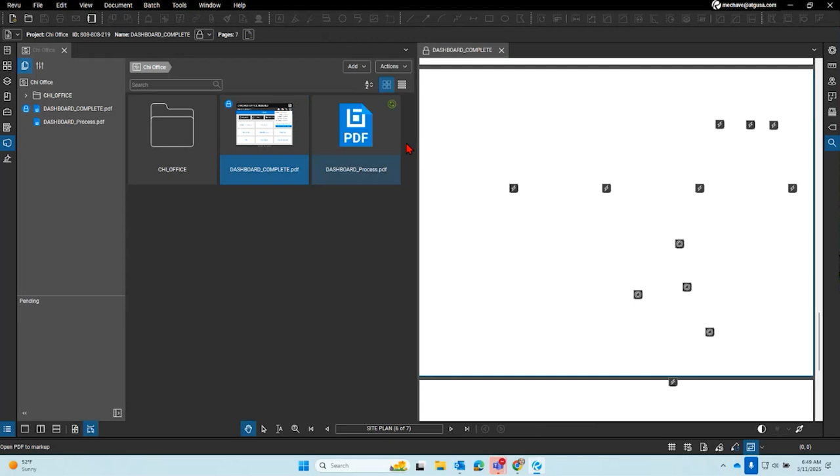That way everyone has access to the similar set of documents, right? So if I go home here, this is not the flattened one - I think this is the one that I created. But if you look, these Thunderbolts won't be here because you typically flatten the PDF so it's clickable. But this gives you one local area to store PDF sets.

So essentially what I could have done on a PDF is store RFIs that link to a location. I'll show this process, but it won't be linked to a specific location in projects because I don't want to go through that whole workflow. But basically you could store items here referenced to something on the PDF requesting for information, and have that documented in your project, then send an email saying, hey, reference this RFI - people can go look, it's in projects. So that would be one thing, it's not alerting somebody, you'd have to email, but that would be the process.

So if I were to go through and create a new project, we'll upload just a PDF set here. New project, MCR 2025. I'm not going to create a dashboard - if that's what you're hoping, we could do dashboards a different day, but we'll just do CDs, and then we'll do another folder called RFIs.

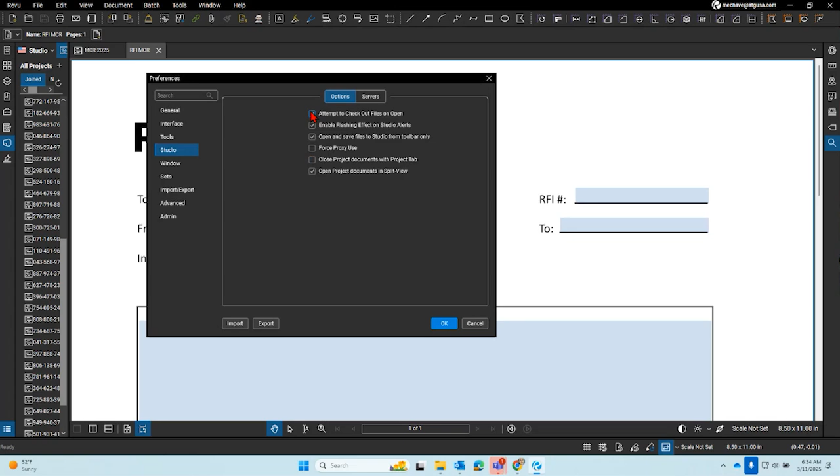All right, there it is, saved - save as, I don't think I have my... Yep, have your what? I don't... that's no, okay. I don't have my studio thing set up. This came up the other day too, and I forgot about it. Yeah, I think it's this one - nope. Search for it, I just forget what it's even called. So let me close out. I know what you're trying to get to, and I can't think of what it's called either - the dialog box, your open save. Yeah, it's my file path. One second, I'll remember - I'm just going to drag it because I already know I can do this manually. Okay.

So if I go through and look at my PDF sets, we'll just use this one as my example. I can click into here, I can open this up. Now, how Bluebeam Studio Projects works is a check-in, check-out basis - so you check it out or check it in to make revisions.

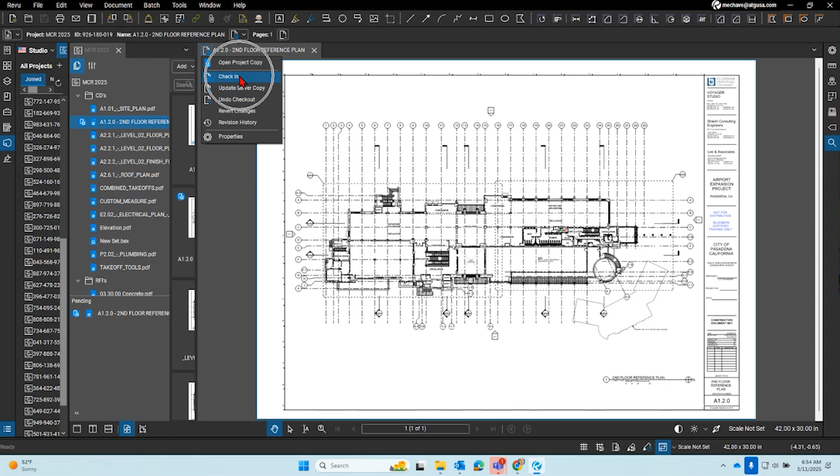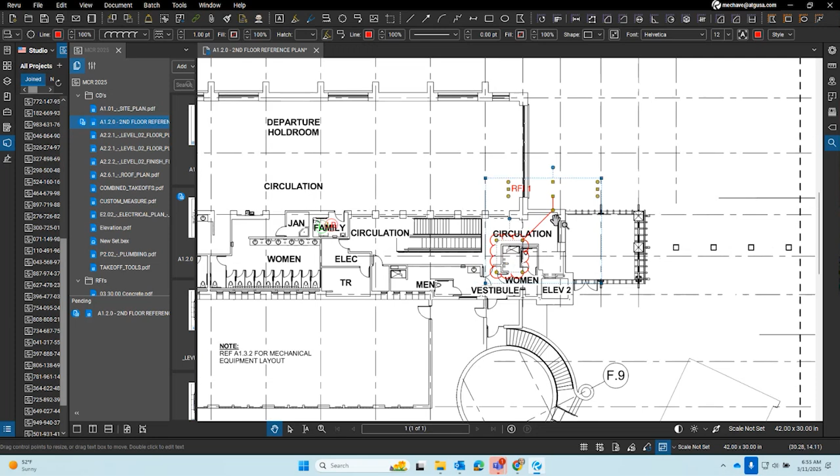Now if I needed a request for information for a specific area, I can easily go through and use a markup and tag it as RFI something, RFI 1, right? That's great and all, but it doesn't tell me what is the RFI 1 PDF, because if I send it to somebody, they're going to have to go and look specifically for the RFI - that's going to take time. I want them to be able to action hop to something. So what I can do is come into here and do an action.

So I can edit action and go to a hyperlink. Nope, we're going to open to a file location and it's still not working. Okay, so this is where we're... Alex put it in the chat. So go to preferences and then interface.

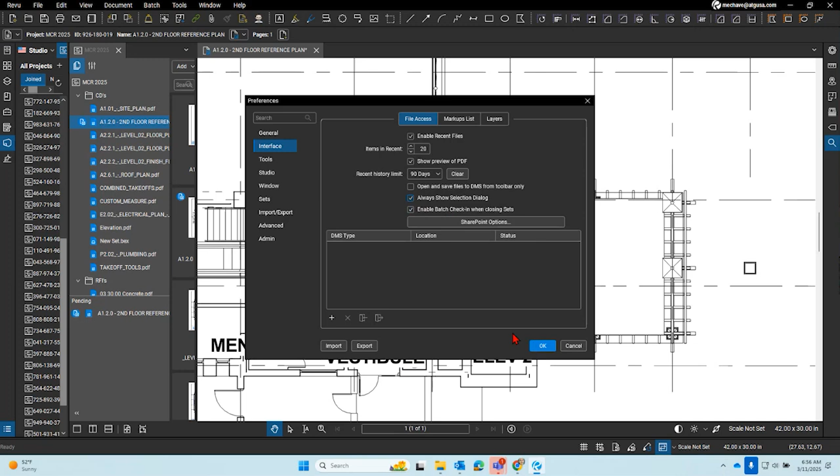So it's not this one. It's not this one, so I'll uncheck those. Interface, and then always show selection dialog. There you go, we're testing Alex's theory here. Make sure that's always checked. It's one of these, and I used to have it, then I deselected it because everyone's like, why do you have to open up two different windows to go to a specific location? Nope, that's not it either.

Hold on, maybe let me... Do I need to hit save? Yeah. It shouldn't be that. Maybe you have to open it and reclose it. Hold on. Dum, dum, dum, dum. Nope. Still not working. Okay, one second.

It's this one. Open and save files, yep, from Studio, from toolbar only. Yep, that's what it is. Okay. So it's this setting right here. I just need to... so let me read this setting right here.

This allows you to open from a location that's not just your local desktop. So going back, there's a lot of MCRs here. Close that. Okay, so going back to my CD sets, going back to this one. I think that was the one.

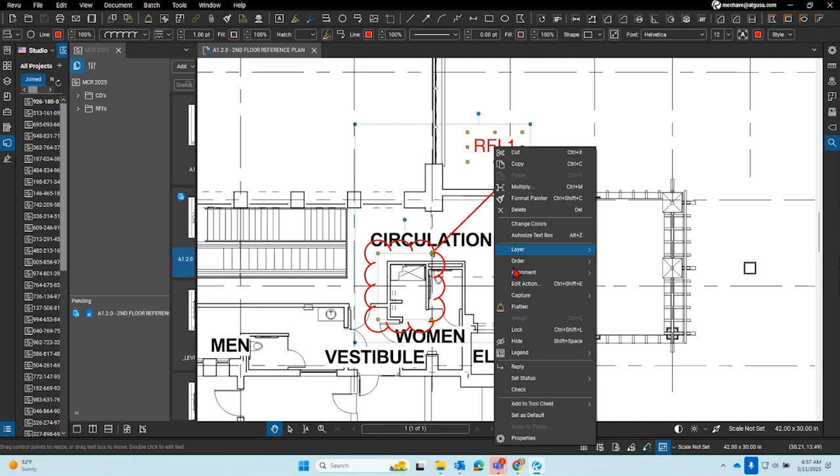Yep, open, check out. Now I'm going to make this as a link. So edit action - it's going to open that RFI from my projects. So it defaults automatically to the project that you're in, which is great when you're doing this workflow. But if you need to go to your other projects, you can just click this button and then scroll through and look at your other projects.

Now, the reason why this is working, let me restate that - the reason why you'd want to do it this way as a workflow is because, how are other people going to consume my collaboration of files, right? So for projects, you can be in... no, you still need a license.

Oh, where are you going with this train of thought? Well, because you can't have a free license and get access to projects, but can you with a free license of cloud? So that would be my question. Because what if you invite somebody that doesn't have a license of Bluebeam Revu? Can they still go into projects? I know they can go into sessions, but they can't typically go into projects, right? Because they have to have a license. So that was me testing a theory.

Someone would have to have a license for you to be working in this collaborative method, but maybe it's cheaper than other alternatives, I don't know. We'll have to go back and visit that from a free license perspective - I'd have to sign in and see. But anyways, going back full circle, so you can come in here and reference that RFI.

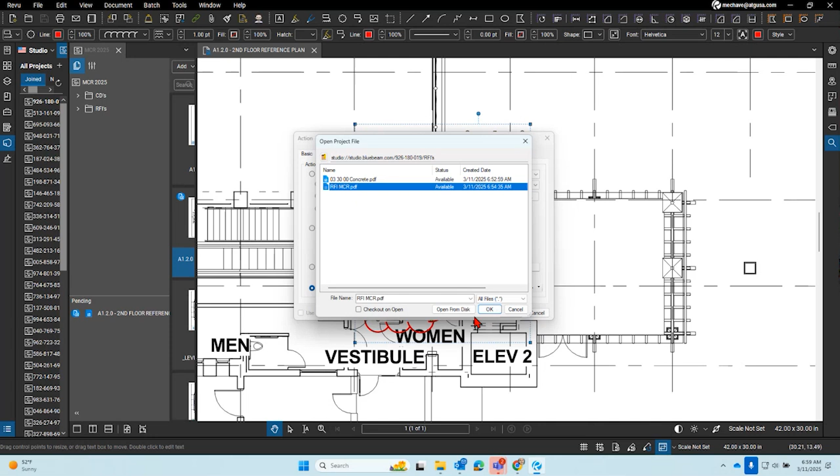We'll do RFI MCR. Now, I do not want to check out on open, I'm just going to hit OK because it's referencing that file. Now, all I need to do to make it clickable is right click and flatten markup. Okay, so now when I click this RFI here, it's going to actually open up in a side-by-side view this RFI.

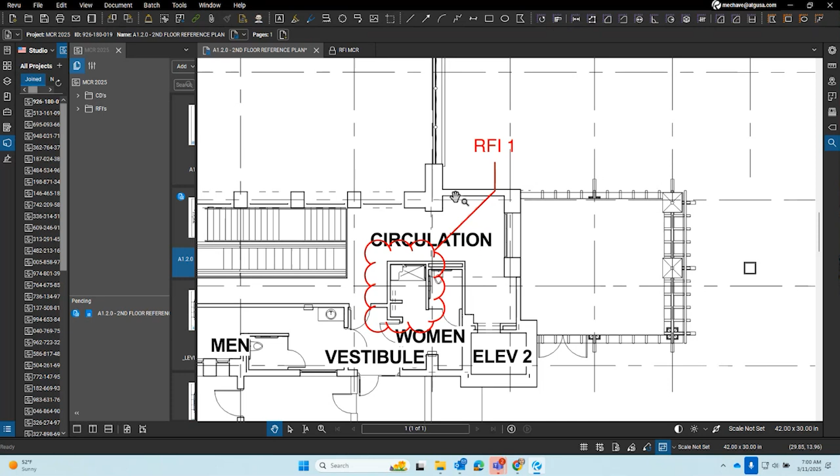However, I know how large CD sets are. If you attach to the back, you're just extending the file size of that PDF set. But this way, you're maintaining a link - it's referenced to a location. And now people can just open it because they're already in the project and the files are all stored local to that specific project.

You know what would be cool, which I don't think happens - if you could set a view log. Say, for anybody that clicks on this link, give me their Bluebeam ID, so I know that Michael clicked on and viewed the RFI.

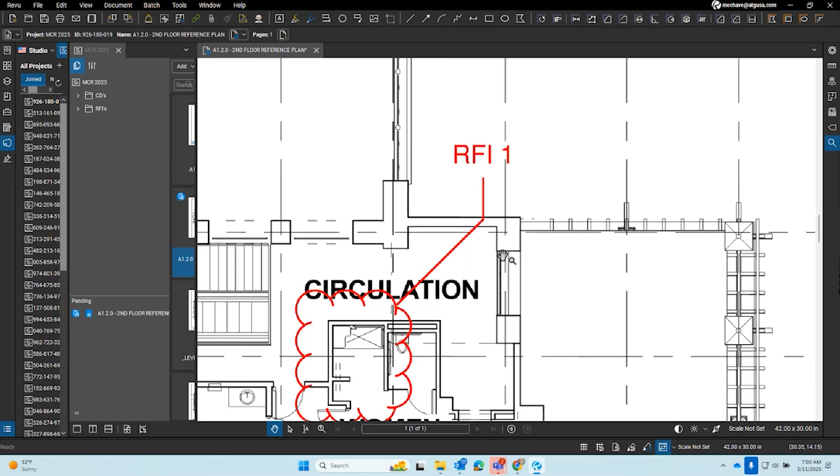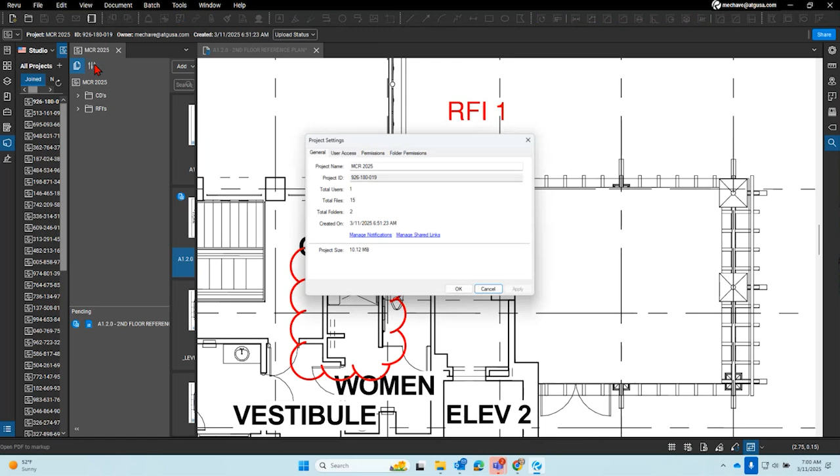Yeah, you probably could do that - it knows that somewhere in the background, right? But that would be a handy log, especially if you're worried about coordination or whatever, similar to that Studio Prime thing, who has access to my studio entirely, but you can see who's opening files. Yeah, there's probably some type of log that happens that you could dive into with the API.

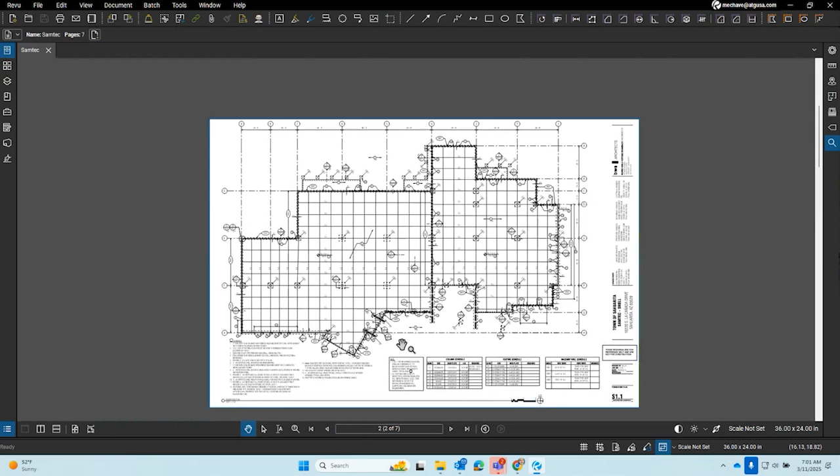Interesting, but this would be a workflow. So the other way would be, if you're probably wondering, let me just do this natively. So if I open up a PDF set, what you would need to do to have this on your actual set.

You could do a file attach and have the icon there to click on it, but that wouldn't be a live link. I don't want to mess up my data sets, so I'm saving over, and this is now local on my desktop.

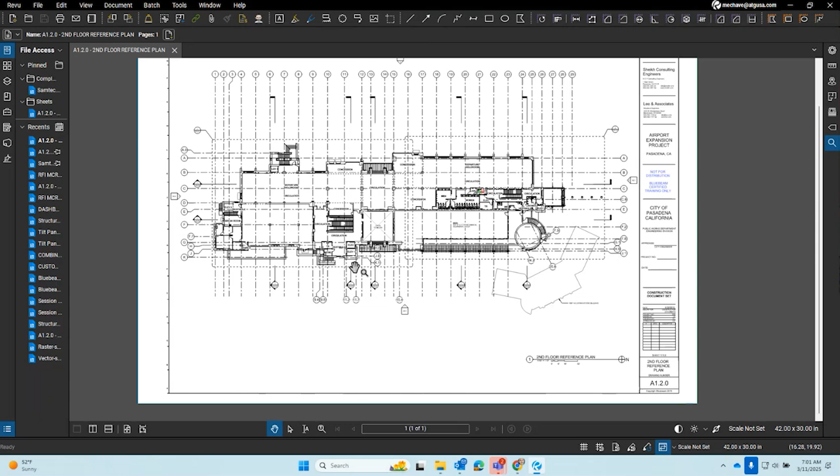So what you would want to do is grab that PDF. You could open it, or you can go to this thumbnail, right click, insert pages from my desktop. We'll go to my desktop here, RFI, boom, whatever, because you can always drag it around. So now it's part of the PDF, right?

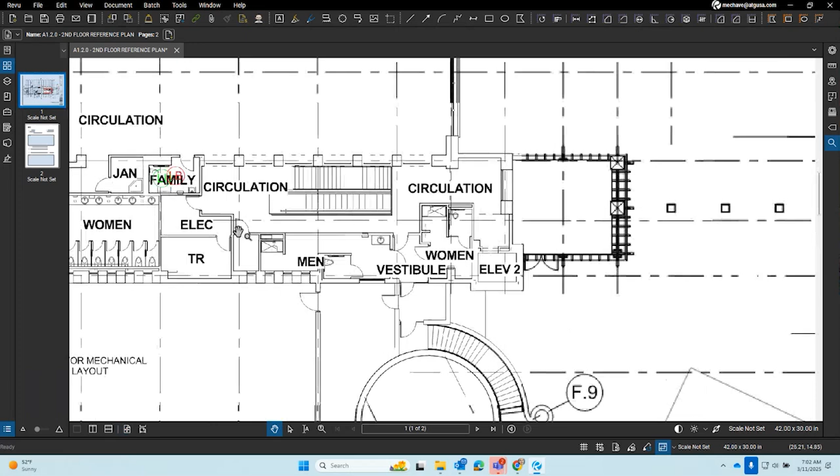So you could do this process if you don't want to use projects. Now we're coming over here, RFI 1, same thing.

Alt Z is the hotkey for auto-sizing the text box. Move it wherever you need to. Maybe it's here now. Thank you.

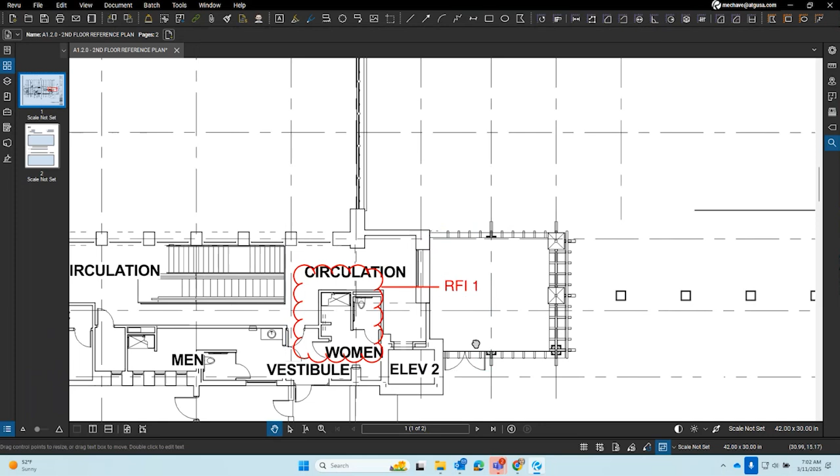We can right click and edit action, and then it can go to a place or a page. So it can go to page number 2. And now you can flatten this and click in, and it brings you to the page, right? So different ways to do the same thing.

And this you could then send to somebody, all the RFIs of this specific file, but it's one file, and my worry would be about most, latest, and greatest, right?

Because collaboration means single source of truth, in my opinion. So studio projects would be a source of truth. This would be a data transfer and not live in one place source of truth. So fragmented data, which is not what you want.

What else? Okay, so there's a question about, maybe I missed the discussion, but does Bluebeam Cloud not natively support RFIs anymore? Back in the Project Rover days, back in the early time, there was specifically an RFI button that I seem to remember, right? We'd have to go in the archives.

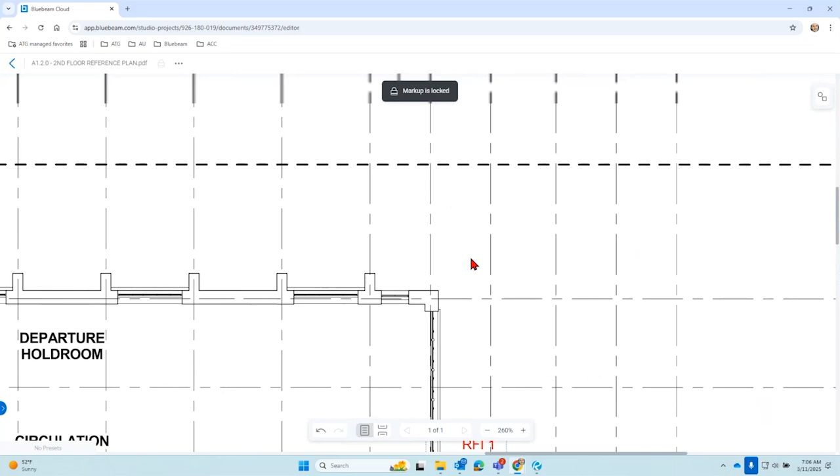This is testing if hyperlinks work in here. It wants you to click it. You see that? Yeah, it wants to. It's not working. It doesn't, Markup is locked. Okay, yeah, it won't click to it.

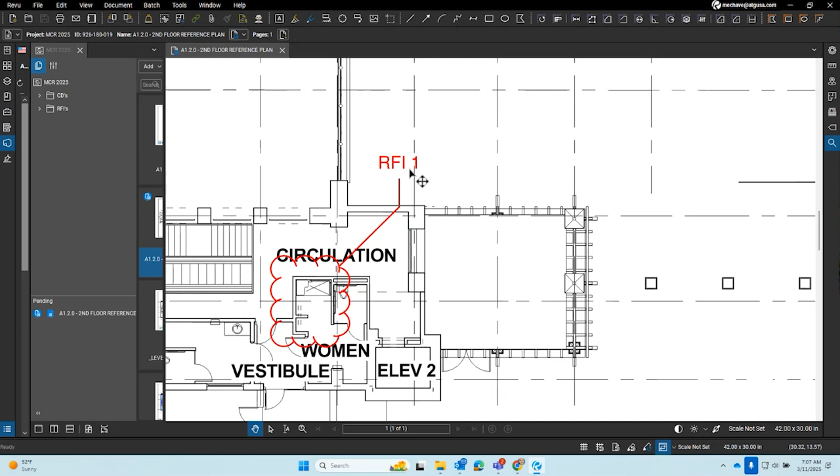Actions don't work? So you would have to go to RFIs because I flattened it, right? Let's check. Yeah, you did. Sets don't work, but individual pages are the way to go when you're in the cloud. Yes. So, but I didn't flatten it. I hit escape, hold on.

What? Of course I hit escape.

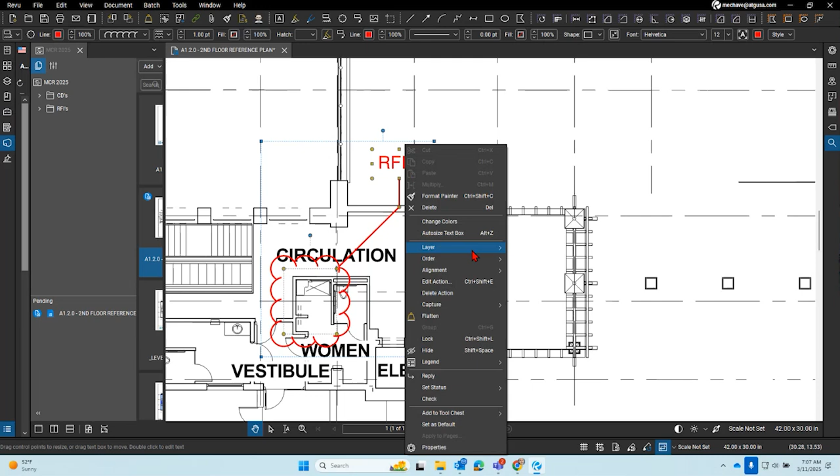You checked in without leaving a comment. Earlier I checked it and didn't even save it, just hit cancel, because I didn't think we were going to do this workflow. But let's see, we're testing it. How do we get around having your RFIs be accessible without a license?

Survey says, oh, we got a hand now. But nothing's happening. I bet you'd have to. Will it give you like a pop-up?

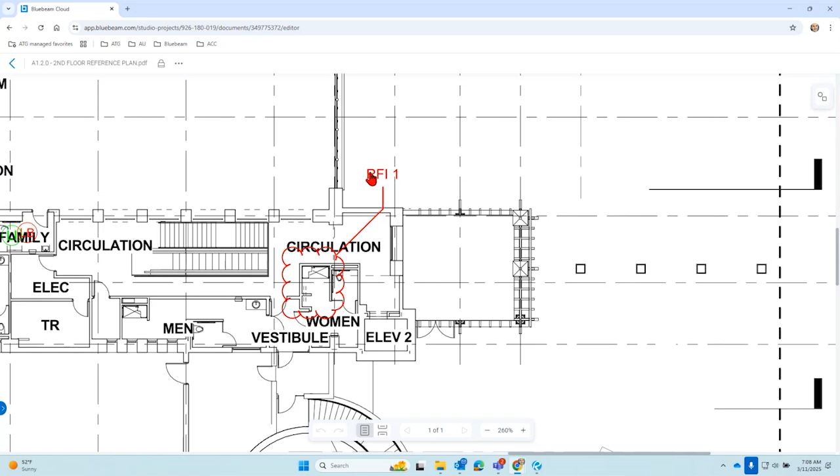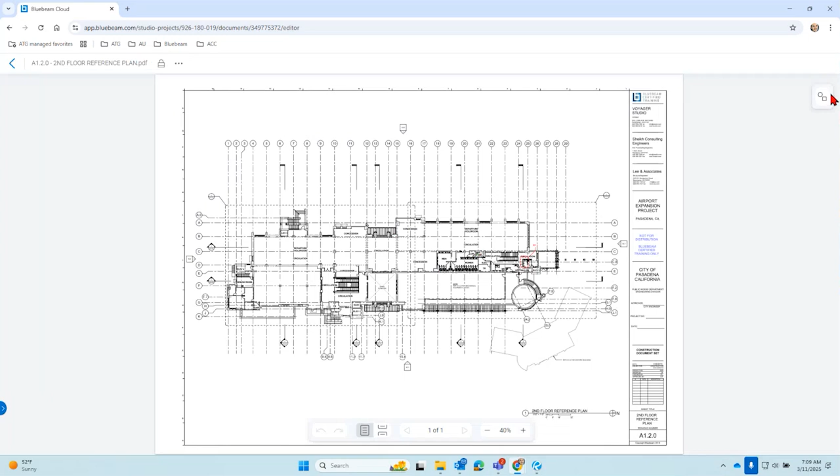No. I wonder if you would have to put the app.bluebeam link in there and not the other link. Because you have that app, you have the link at the top. It's loading. Yeah, that's a bummer. Would it work if it was the second sheet? Yeah.

Yeah, this is interesting, because I know we had talked about linking details and doing those hyperlinks. Do none of the links work? Or is it just this one that's trying to go to a studio project?

I don't know, I know I have one of these. It's kind of the same. These go to... so going to other pages works, yes. So this is another page, right?

Old logo days, old logo days, old tech bios. I bet you Matt's is in here. Training outlines, data sets. But yeah, that works. So this works to itself, but they'll need to fix that and how it opens up, because this would be the workflow for mobile device, right?

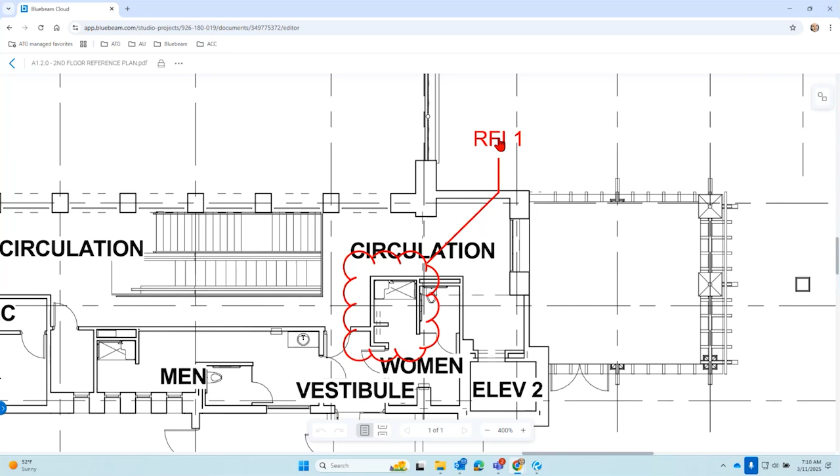That's a bummer. Okay, anyways, but yeah, so for a free user, you can get access to sessions, and in sessions you can still come in and mark up. That is true.

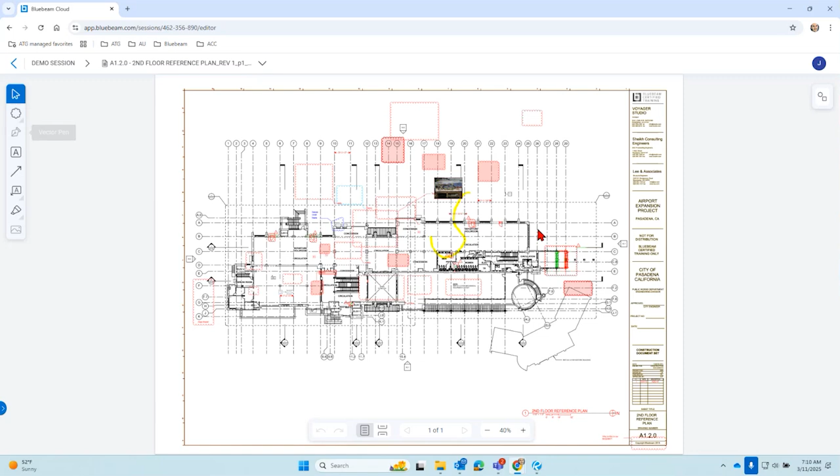Oh, this is what I was getting warnings from. Did they truly limit it? I wonder if that one has a set scale. Maybe.

Anyways, but yeah, you can come in here and mark up if you need to as a free user, so that you can collaborate. Your markups are just limited. Like you can't add a vector pen, call out. Can you use Cloud Plus? Look at that, you can.

Maybe you can't. It won't let me type. Oh, there we go.

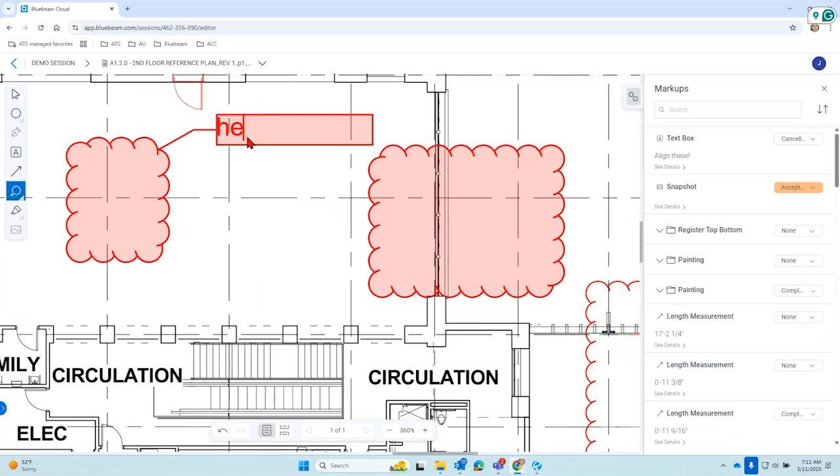So for Free App, there is the ability to have collaboration for folks that are maybe looking at the free application itself, right? You're worried about your team members that may not have a paid for application that need to revise stuff and work offline. I'm not going to disconnect from the internet on my computer, because I would lose all of you right now in this session.

But basically, now again, you have access to markups via PDFs via no internet connection, which was a huge downside in my opinion. We won't talk about the tool sets yet, but right now, I think that was top of mind talking with clients, because they're like, well, what if we go out to the field and there's no internet connection?

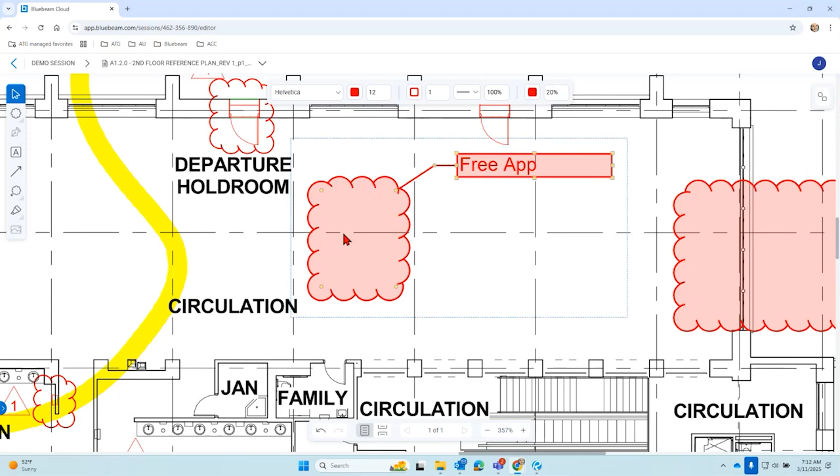That happens more frequently than you think. Absolutely more than I thought. Heck, there's rooms in certain offices that don't have good Wi-Fi signal. So yeah, that is a real thing, especially if we are talking about construction coordination.

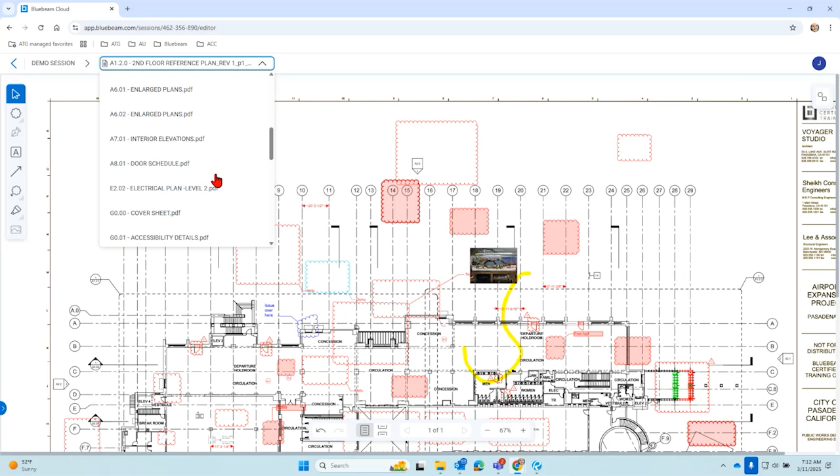But yeah, it's hard to test while we're connected to the internet. But supposedly that functionality is there, and that functionality came out last Tuesday, so March 4th. So if you haven't played with that yet, it's available now, apparently. And there should be a new pane or window or taskbar or something that shows you what hasn't been uploaded yet.

Buy now, buy now. Yeah, as this thing just never goes away. Well, I mean, it's not the most annoying pop-up in the world compared to other solutions. Yeah, like a news website, for crying out loud—you get two sentences in, and it's like, oh by the way, do you want to know what's happening? That'd be $12.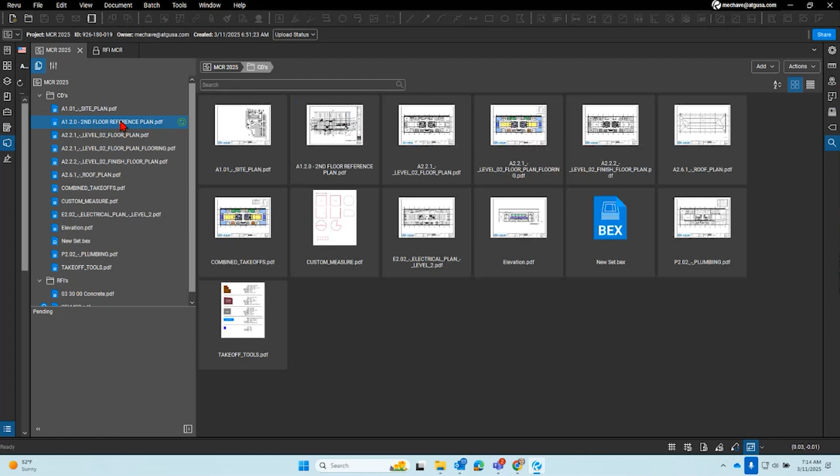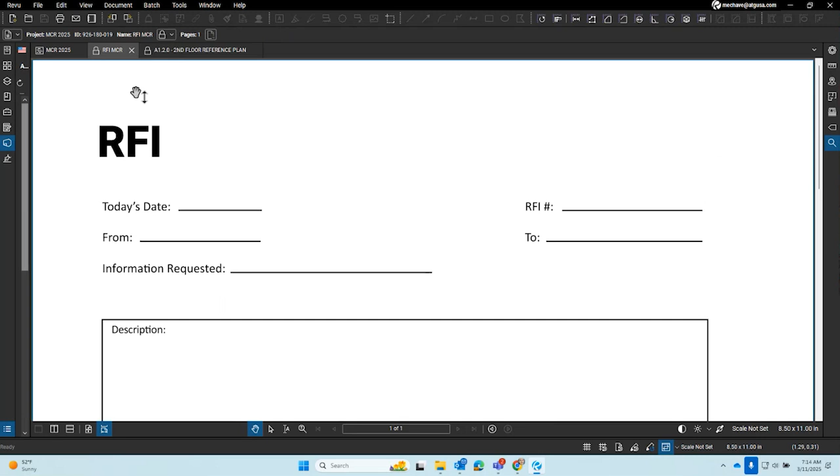If you were doing this process without a dashboard, having people search through your CD sets would be kind of painful. I would probably look at my RFIs and want to know where that RFI is on the PDF set, so you can always do an opposite. Basically what you'd do is check out.

Yeah, it's the only way to do your forms otherwise. I'd probably have to do it off this thing right here. I would have to create a button to do an action. That's unfortunate, but you can go through into here.

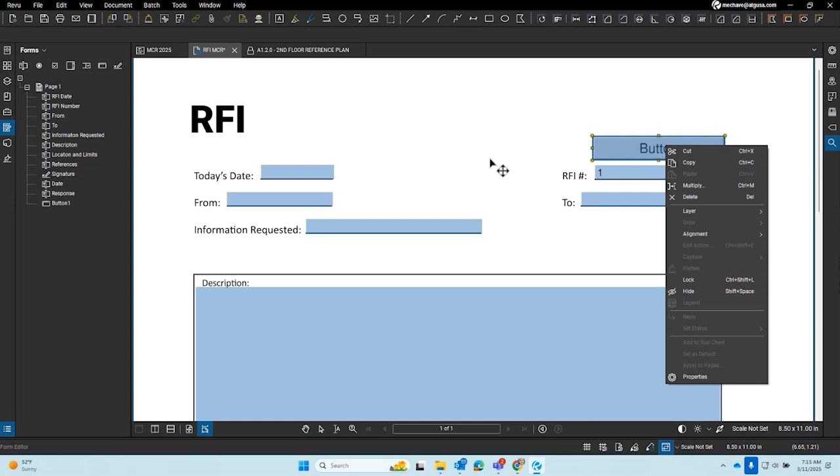You can create what's called a button, and then you can label it whatever. It doesn't need to look like this, but essentially that button is an action to somewhere, so then you can make it go to that page. So there are options.

Oh, beveled, look, wait, go up. There are different looks you can have to that, like underline, solid. Oh, I like the beveled, it's kind of neat. And then you can say options for it, label only, right, label button.

But you just add your action down here and then it opens to that PDF. You could do like a page on there as well, right? So that's completely the wrong one, but you can still have it.

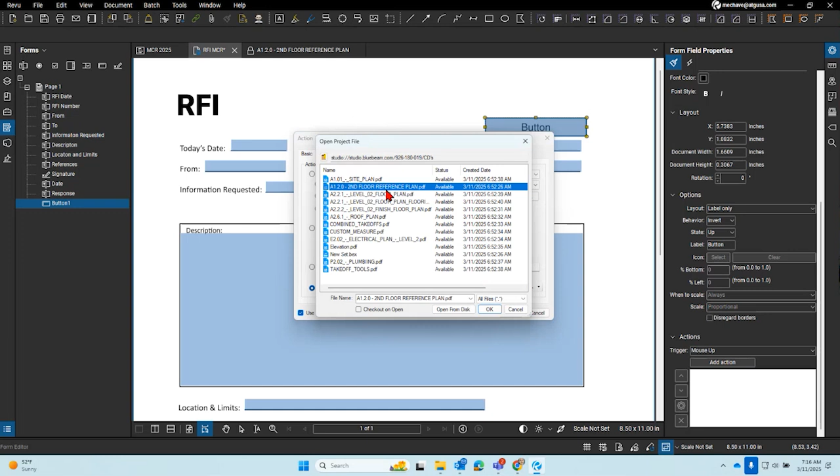And look, there's even checkout on open, that's kind of neat if you wanted people to modify it. Then you flatten the button in order for it to go, but there we are, so now they're tied back to one another.

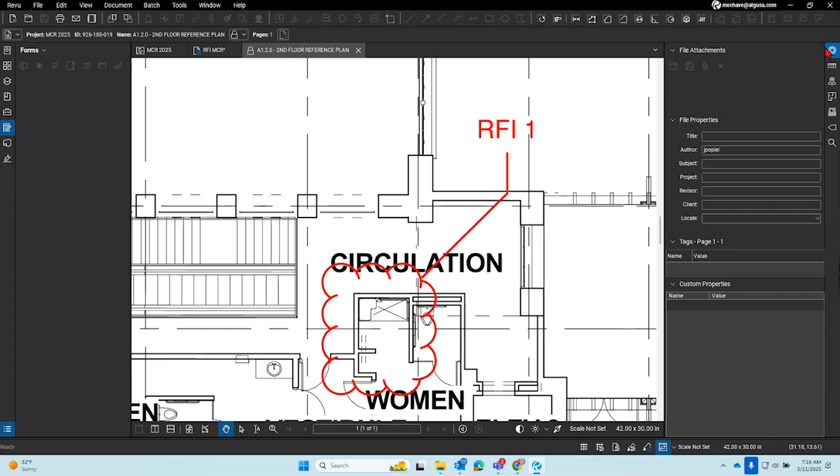Yeah, so you can go here, and then you're not worried about like, well, where was this on the PDF set. It's part of it. Pretty magical, yeah, just ease of use.

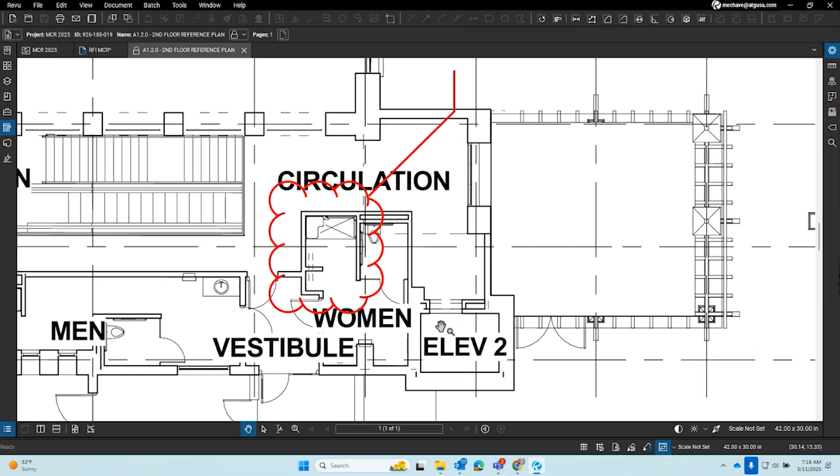So one thing that's come up when it comes to coordination is, if I've got multiple submittals and I want to coordinate, is it best to just create a session and delete those files, or rename or re-upload? So I've got my first submittal, and then okay everybody, we're done with this when we go to the second submittal. Or would the better workflow be to have it all organized in a studio project and build a session from there?

In a submittal workflow, I would do a studio project because sessions are going to end and restart. That's a submittal process, not upload, keeping the same session for a new submittal. I guess it comes down to your workflow, but I would personally add a new folder to the hierarchy here.

This is where my submittals would be, and I'm just going to upload a PDF. Which one, what do we want to add into here? We'll do this one, cool. Oh yeah, that one, I asked and I just threw some in there.

But basically, what you could do is from a project, you can initiate a session. So what you're able to do is add to a new session. I guess you could create this. You could keep the same session active, and you can just say this is your submittals, right, and then you can just reinitiate new PDFs into that session.

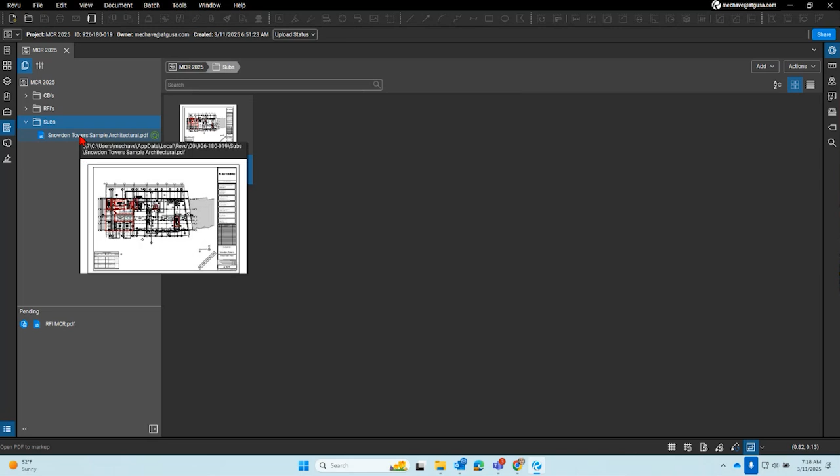But basically, this is going to initiate into a session, so it checks out, it's created a session. Now in the session itself, right, wait a second, because I clicked.

And Matt brings up a good point too, like I'll do the project because projects can support way more file types. A session's only going to work with a PDF. A project is going to work with just about everything except for a zip file and an exe file. So if you've got supporting spreadsheets or CAD files or images, you just throw them all in there, organized of course.

And basically, from here, you have your session of files. Now, if this was referenced to a PDF, not other documents for your submittals, again, you have all of your files in this specific location.

Now, in sessions, you can add more. So if I were to add another PDF set, let's see, right there. You can then re-add this into the existing session, and now you have a couple submittals. But basically, you check it back in or update the copy from the session itself. So in the session, you can right-click and update project copy and then just delete it.

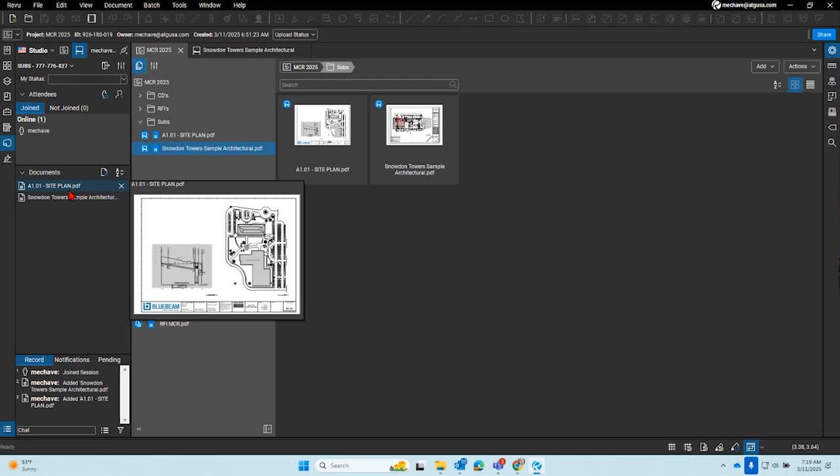It is bilateral, but it's checked out, so you're not going to be modifying the project copy either way, you're going to be modifying the session. Then when you're ready to update the project copy, you update the project copy, which checks it in. It takes a minute, so don't go directly into the project after to look and see if it updated.

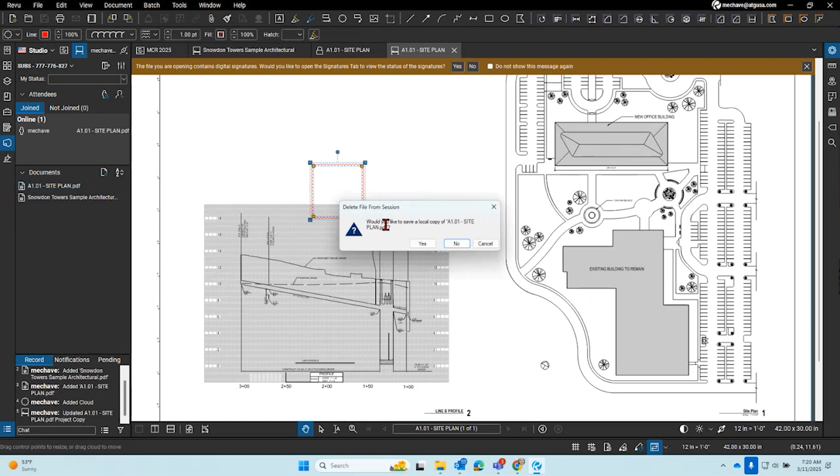It did, but you can then delete this from this session. Would you like to save a local copy? No, you probably would, but I didn't because I like to.

Anyways, so you can come over to here, same thing. This one is the other one. You can come in here and mark up, update server copy. It's checking it in to update the server copy. You can delete it.

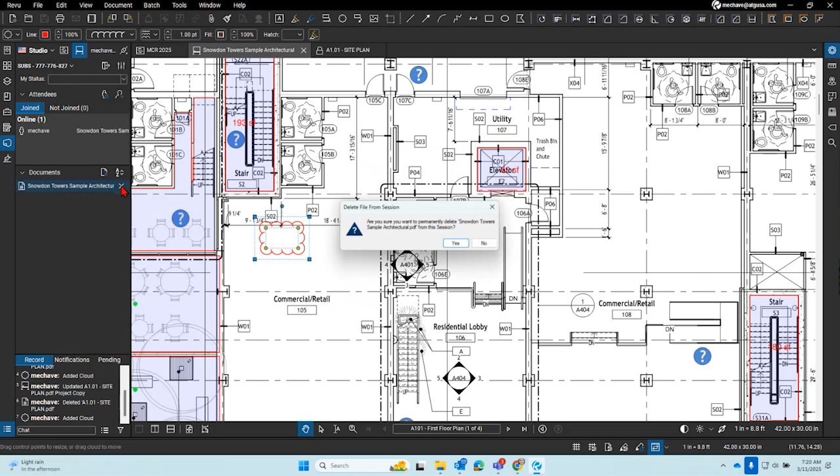It will update here, but not right away. So don't freak out.

Question from Dan: from a consultant point of view, to track architectural floor plan changes as the project moves along, what is the best option if we had a choice, projects or sessions?

Since architects like to change floor plans all the time, would you do revision 1, revision 2, save them in different folder locations, or how would you track architect revisions as a project progresses?

Maybe have an outdated folder in a studio project. Are we talking about removing it entirely? Yeah, we're talking about something that was updated in the set. At what phase? Doesn't matter, say the architect moved a wall, right?

And a new PDF was issued for that floor plan, but then there's also relative sheets. That's what slip sheet was built for. So you just do slip sheeting to your PDF set.

So you still have the existing set, but you slip in all of the new PDFs. You could do an append or a non-append, so you can reference the old PDF before. Not sets, but slip sheeting, because sets doesn't work in projects.

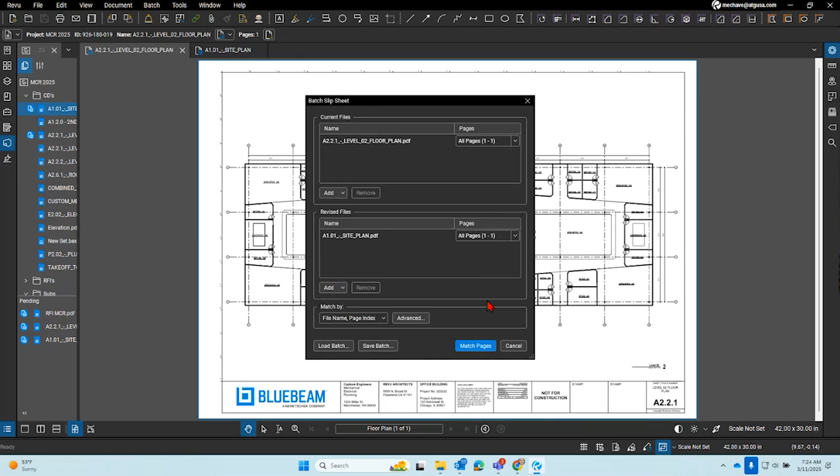So there we go. With slip sheet, add, not replace, can you compare the two sheet versions to identify what changed? Good question, Tom. It won't let me. Denied. Well, if I just say these two are matched, hit okay.

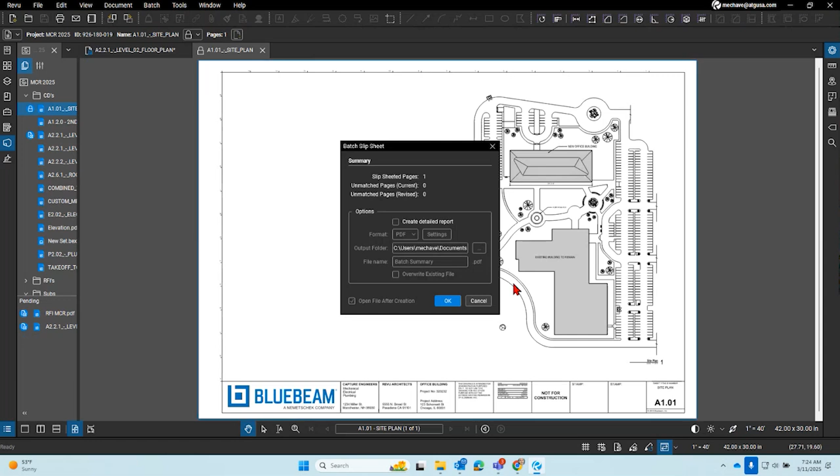But it's gonna save it. Where's it gonna save it? Does it overwrite? Especially because you got one not checked out. Oh, it did, that's it. Okay, it did, so it did work.

Just superseded automatically. And this was with two files in a Studio project. So Studio Projects does work with slip sheeting when they're checked out. Both files had to be checked out, of course, right?

So now, can you do a document compare on those two? I don't like the compare tool, but yeah, if you want to compare this one to that one, is that what they're saying? Yeah.

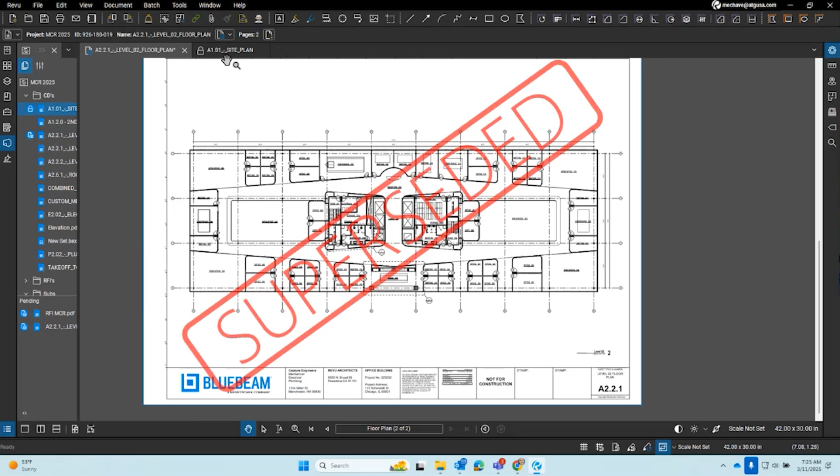Let's see, so current open files, browse. Yeah, I'd probably do it from this one. What was it? Site plan. Okay.

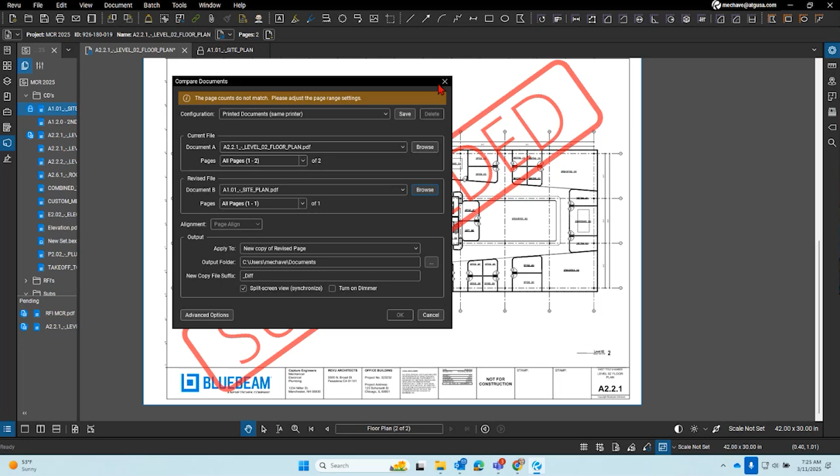Well, you don't want to compare floor plan to site plan. I mean, there is no original file because it got oversaved, right? You could do revision history and look at the old one, save it out, and compare there.

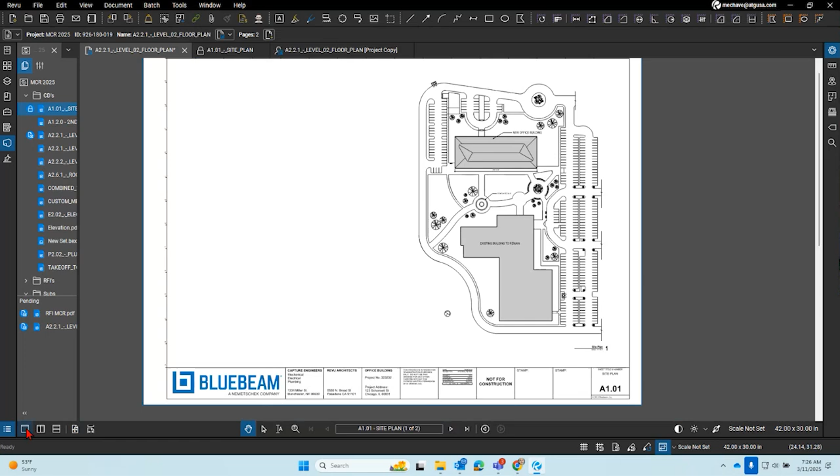In ACC, you can compare different revisions. You'd have to just make a copy of it. Or you can compare it by split screen with synchronized pages. Then Tom asked a follow-up question.

Why do you not like the compare document tool? Do you like overlay better? I don't like either of them. Do tell, explain the why.

Because viewports move, and it doesn't look at orientation of those viewports, so I prefer to do a snapshot, copy and paste specific areas that I need to compare of a document. It doesn't auto align properly for viewport orientation and moving of the document. Now it will in the future, so I was told, in true AI fashion.

If you didn't know, Bluebeam announced it released an AI feature for overlay pages to automatically align, but it's only looking at characteristics on the page size, apparently it's also looking at the title blocks. So it gets a bonus there and specific points to align the title block and the page size.

But it's not actually looking at the data, which moves from viewport to viewport or detail to detail on a page. If we reoriented some and moved around some details, they're all going to be wrong when you do an overlay. So I personally don't like the feature.

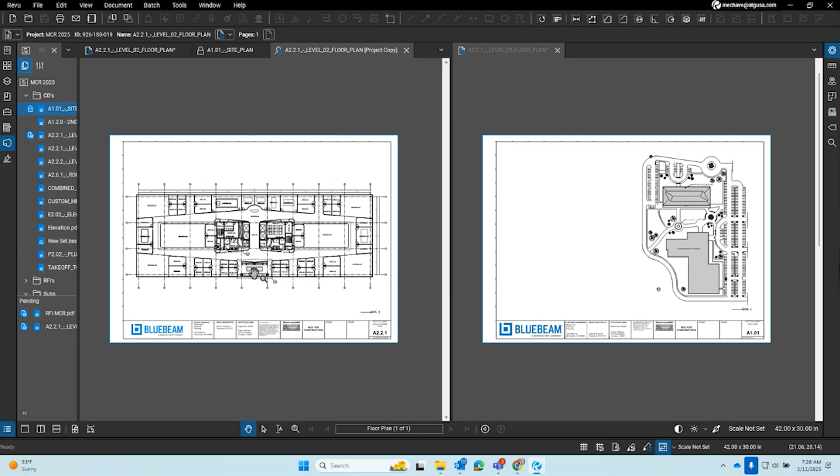So yeah, there's some tricks to overlay, and this depends on the granularity you need, whether or not viewports changed, whether or not other things moved. But the snapshot workflow is pretty slick. I've shown that off not too far back, yeah. There's a YouTube video that has a lot of views from that one.

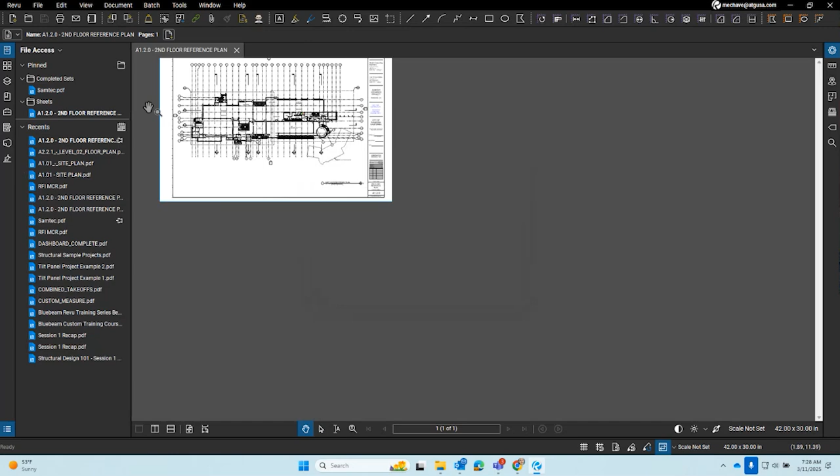Basically, this is the same thing I did last time, and that's why I was like, what happened to it? I didn't save or check it in. But yeah, basically what I prefer to do is just a highlight of an area that I wanted to address anyways.

So basically what I'll do is go through and open up a revision. This is why I deselected it in the first place, because now I have to go back and click through different folders to get access to something. But it's simple, G hotkey for snapshot.

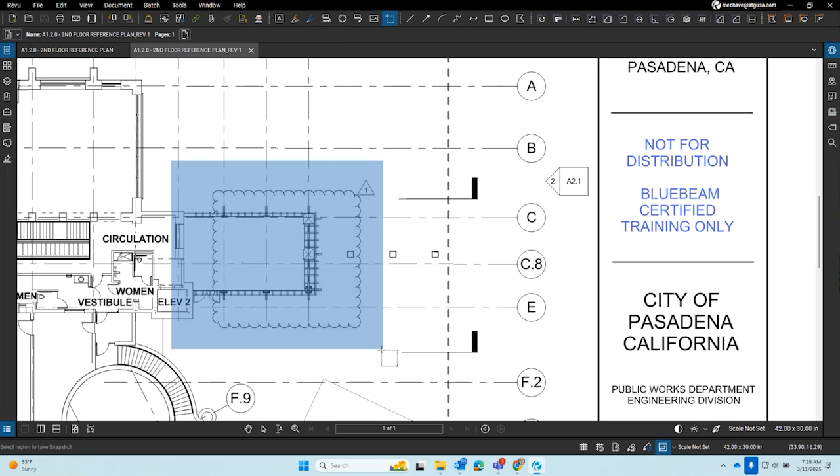Control V. I'm not going to do Control Shift V because the intention of this would be to not have it align, right? You could do Control Shift V, which copies to the same place, but the intent was for it not to align. That's why I'm using this method versus the built-in solution.

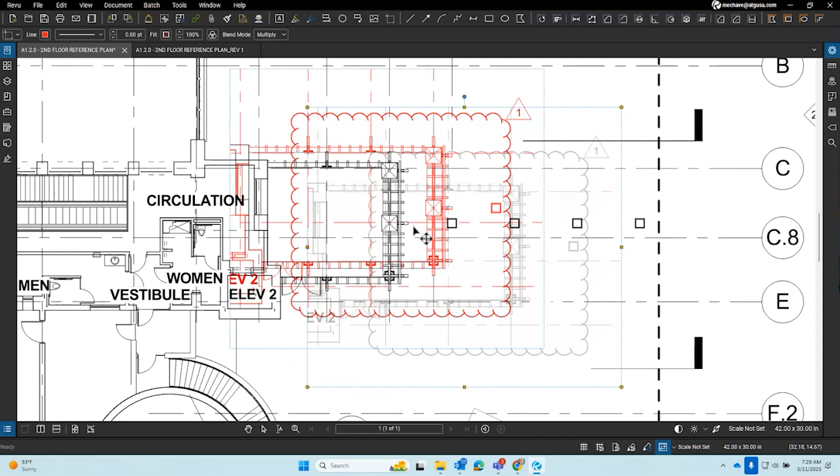So I'm going to modify colors by colorize, and now we can go through and align. You can scroll in, get this close enough. There we are. And now I can see the difference - this view moved and I needed to align this.

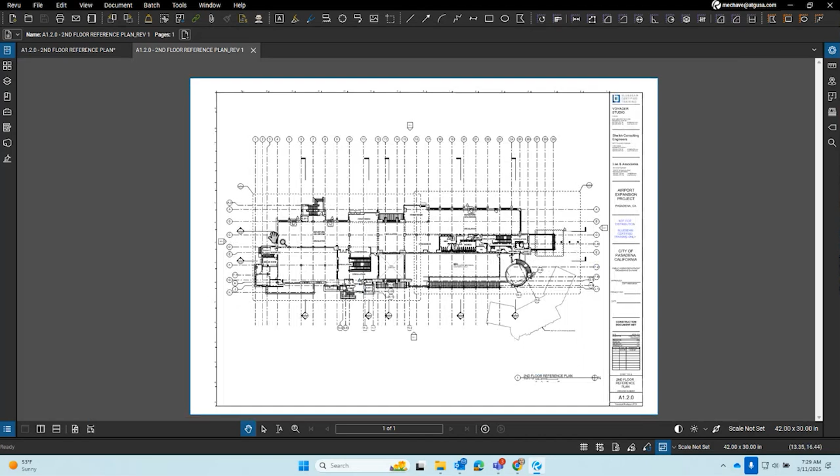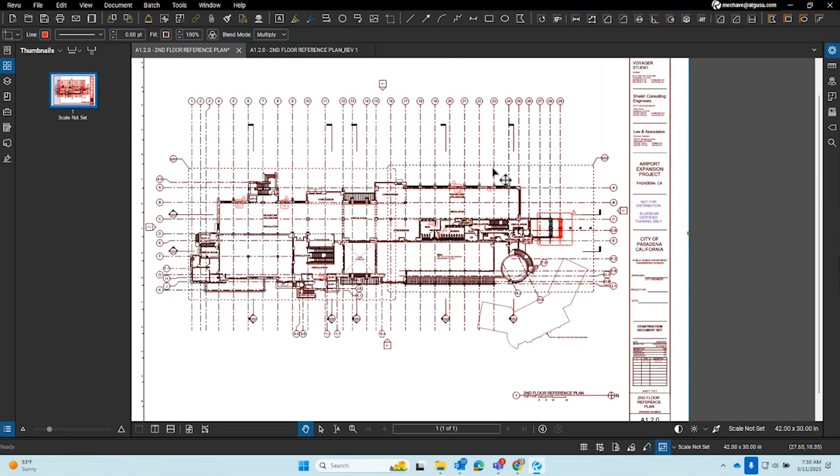Now you can do the same thing with the entire page. So I can come into here, copy as a snapshot, back over to here, Control Shift V in the same spot. And now I would go through and do multiply, but also I would change colors and colorize the entire set. Then additionally I would add this as a layer, Rev 1, so that I can turn it on and off.

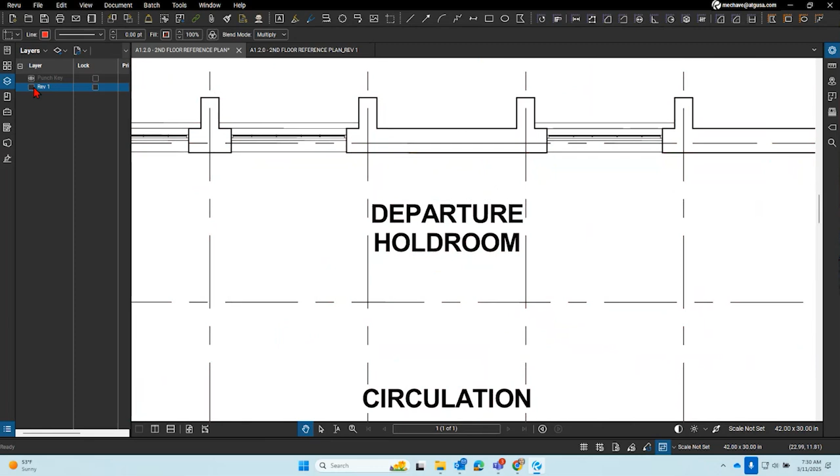Magic. But now you have the whole file size, file PDF. This is if it was in the same spot. But even if it wasn't in the same spot, you can still do the same thing. Let's say the viewport moved up - you can drag this whole thing up to match that new location because it's not the same spot.

We all know this happens very frequently - views do move on PDF sets. That's one way to fix it.